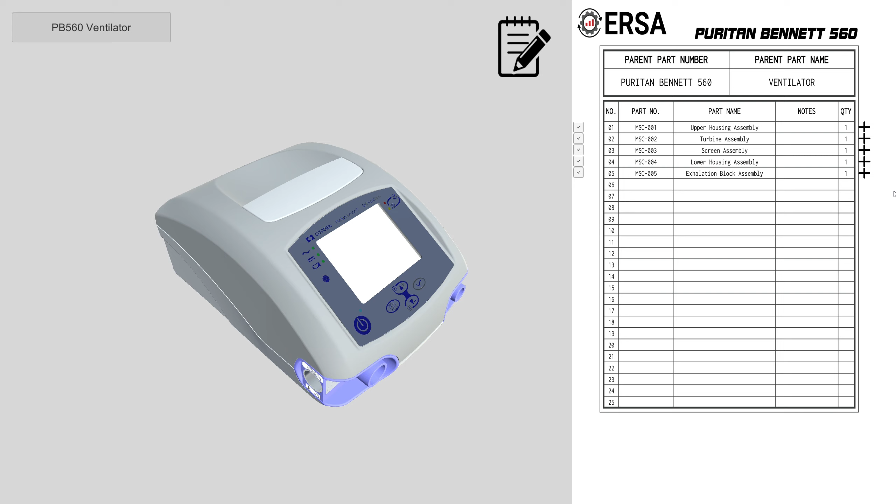Hello, today I would like to introduce you to the ERSA Technologies 3D Parts Manual. For this example, we have chosen the Puritan Bennett 560, manufactured and sold by Medtronic. Medtronic released this design as open source during the COVID-19 pandemic, which is an excellent opportunity for us to use their high-quality 3D models to show off our parts manual.

When you first launch the parts manual, you will start with the main screen. On the top left, you have the name of the unit. On the right, you have a list of the assemblies found in the unit. And in the center, you have the unit itself.

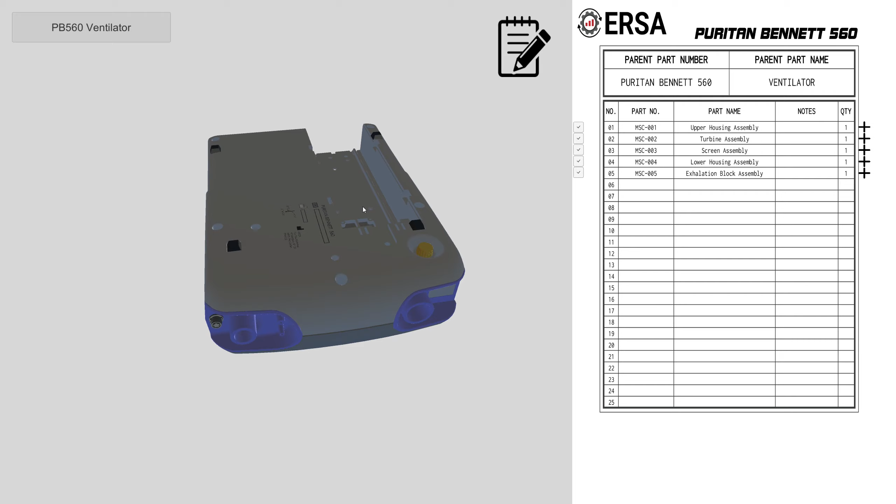The mouse controls are very simple. With the left mouse button, if you click and hold, you can rotate in any axis to view the unit from all sides. If you get a bit lost, you can click the middle mouse button to return to the starting position. If you hold the right mouse button, you can pan left and right, up and down. This becomes useful later as you dig down inside the object.

You can see here we have a number of checkboxes. Each one of these checkboxes will remove that item from the view so you can see inside the machine. And on the far right, we have plus signs. These plus signs will take you down into that assembly only.

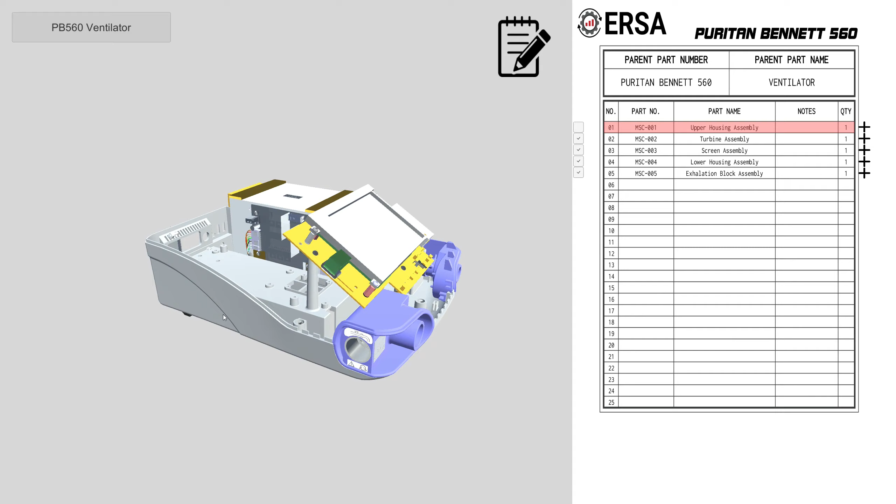So first, let's take off the cover. That's the upper housing. I can also select it by just clicking on it. If I want to make the upper housing transparent, I click this checkbox and now it's gone. Once again, I can rotate from all sides, and with the mouse wheel, I can also zoom in.

You can see here, this is a very high quality model. We even have the spring for the latch mechanism included. So Medtronic has done an excellent job.

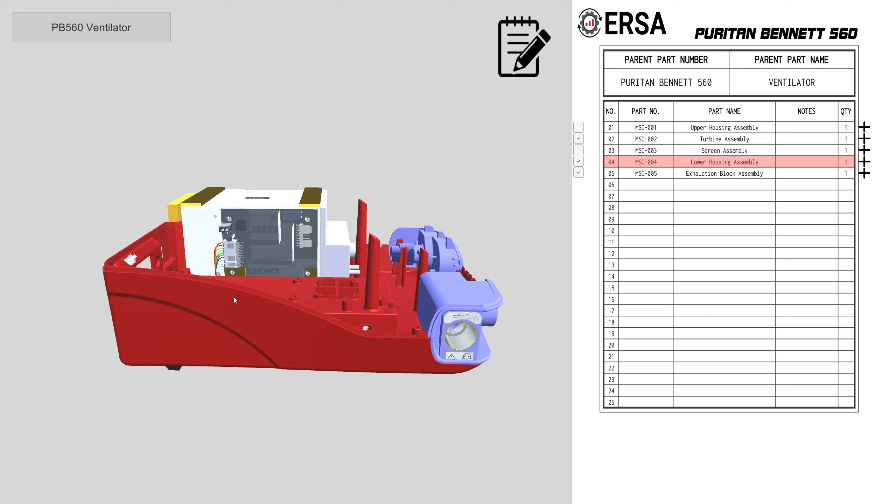If we want to go further, this is a screen assembly. I can remove that as well, and now have a very clear look at the lower housing, or at the turbine. Now we're going to take a closer look at the turbine because it's kind of tucked in there deeply.

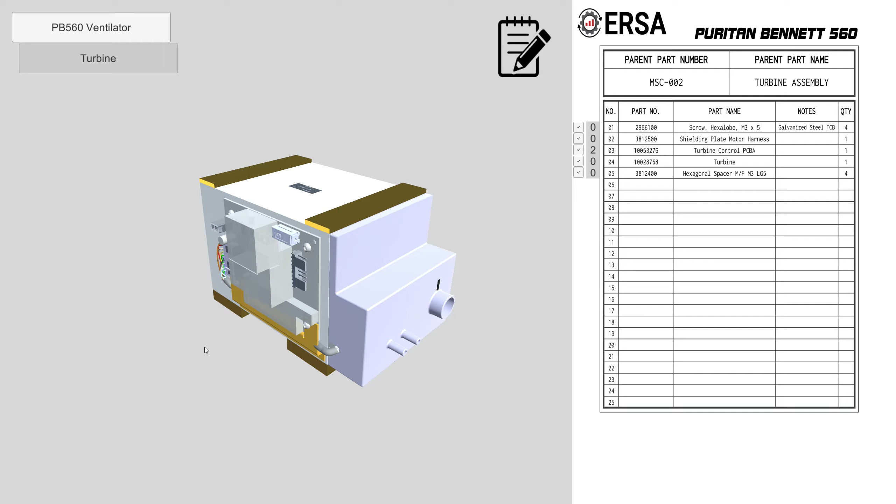So on the far right, again, I have this plus symbol. This will take me down to the turbine assembly. Now you can see that my parts list has changed - these are only the parts in the turbine assembly. And if I rotate again, we can see throughout what constitutes that part of the model.

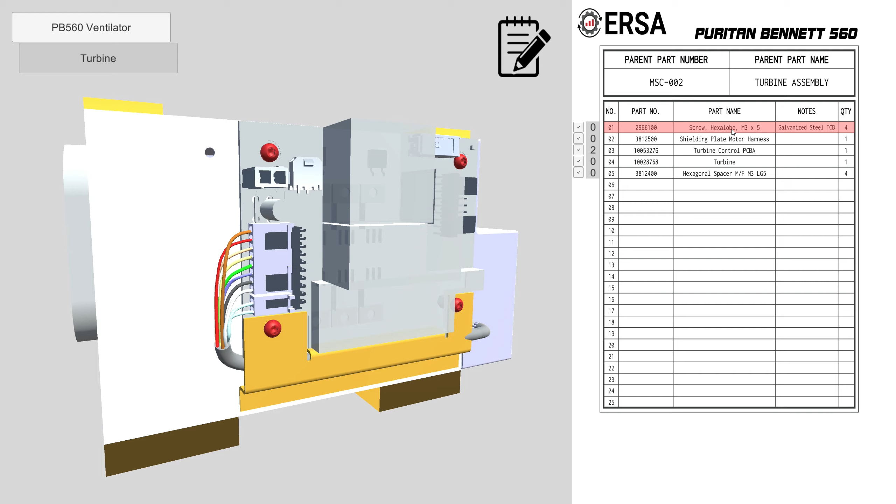If we click on these, we have 4 screws that are highlighted. These are Hexalobe M3x5, and they're galvanized steel screws.

Now you may need to order some, and in order to order them, you simply fill in this number here, and I'm going to order 10 screws. Then, if I come up to the clipboard, you can see that I've added an order with the part number, the quantity, the parent assembly name, and the parent assembly number.

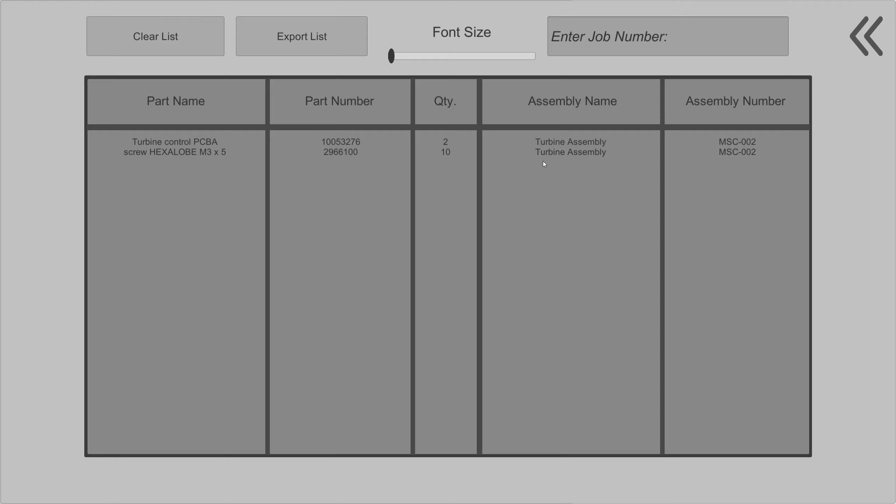This list can be exported either in comma delimited format, by email, or it can be directly tied into the API of your ERP system.

If we clear that, we can go back, and we're back at our assembly. If we want to go to the parent, on the top left, we just click PB560 ventilator, and we're back to our starting point. So we can take a look at the exhalation block assembly.

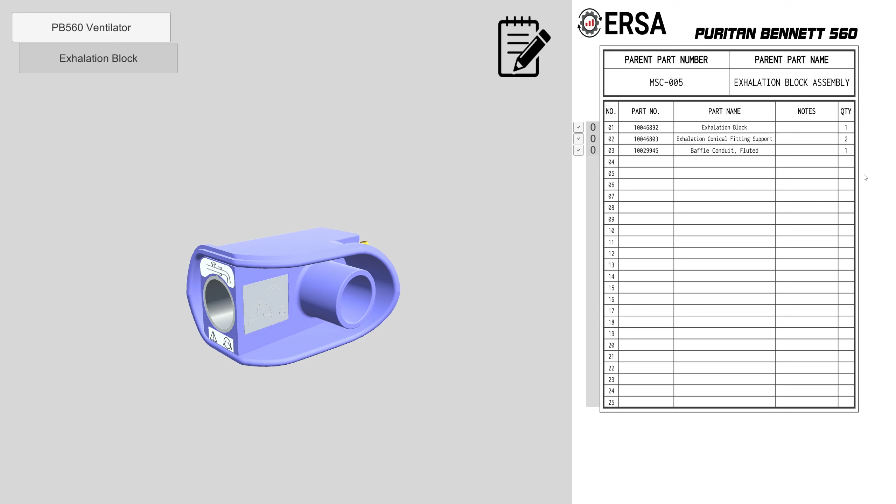This is quite a simple design, not too many parts. You've got the outside support, the block itself, and then inside here is a conduit. There it is on the back.

And once again, if we need to order more, I'm going to order 10 conduits - I don't know why, but just in case. Now they're back on our parts list and can be ordered at a click of the mouse.

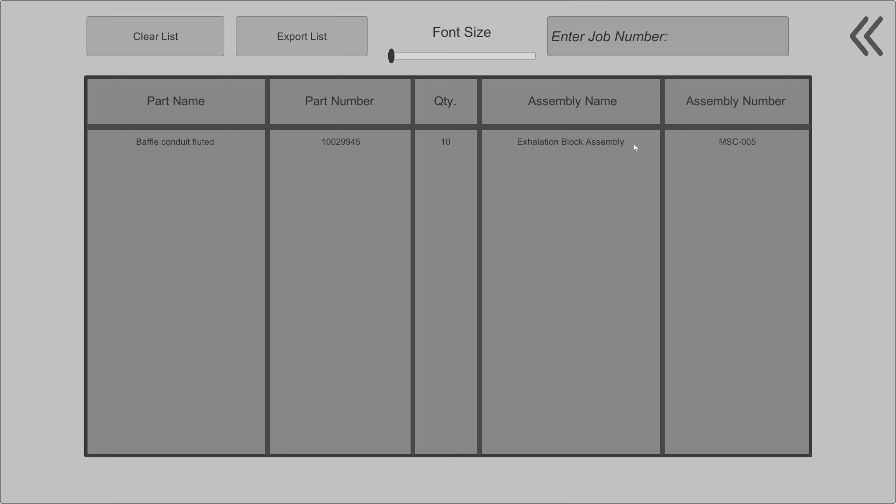And that is a brief introduction to the ERSA 3D Parts Manual. Hope you liked it.